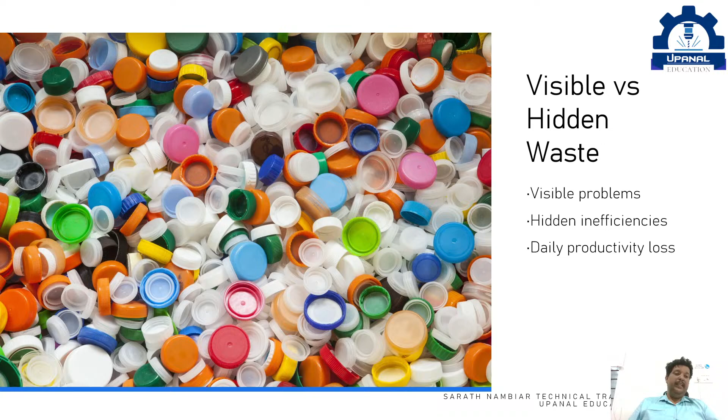These are activities that consume time and resources but do not add value to the product or service. Examples include unnecessary movement, waiting for materials, excessive inventory, repeated rework, poor workplace organization, etc. So, lean thinking focuses on identifying and eliminating these hidden wastes. Lean manufacturing. Lean, what do you mean by that? It's maximum value with minimum waste.

So lean manufacturing is a philosophy that focuses on maximizing value while minimizing waste. This value we mention here is not an amount or anything. It is the activities that directly contribute to producing a product or delivering a service that customers are willing to pay for. Anything that does not contribute to value is considered waste. The goal of lean thinking is not simply to work harder, but to work smarter by removing unnecessary steps and improving processes.

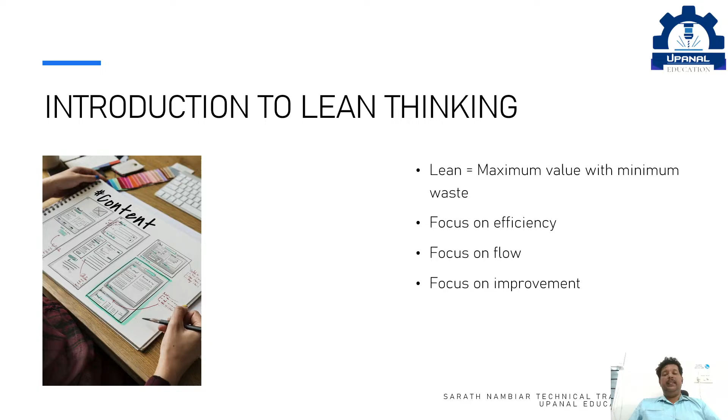Now, lean thinking identifies three major sources of inefficiencies in any process. It's known as Muda, Mura, and Muri. So, first one is Muda, which refers to wasteful activities that do not add any value. The second one is Mura, which refers to unevenness or inconsistency in production or the workflow. The third is Muri, which refers to overburdening people or machines beyond their capacity.

So, when you understand these three concepts, it will help organizations to design smoother and more efficient operations.

I hope you're understanding this. If you have any doubt, you can just message me in the message box and I'll be replying for that.

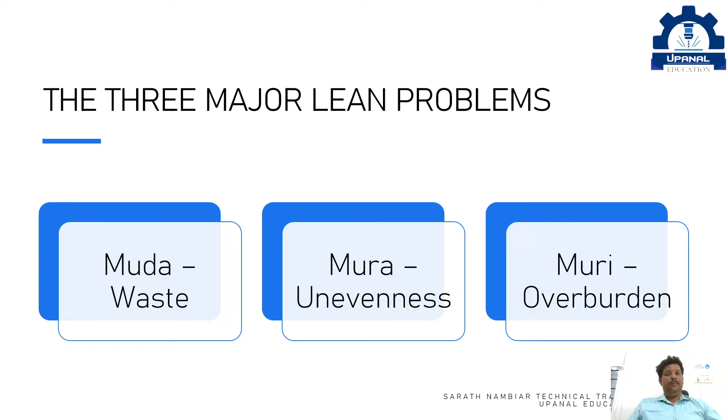Now, let's go individually through each of these. Muda. Muda represents the waste in the system, which includes any activity that consumes time, effort, or resources without adding value to a final product. For example, excessive transportation of materials, unnecessary motion by workers, waiting time between operations, and producing more items than required. Lean organizations constantly analyze processes to identify and eliminate these wastes.

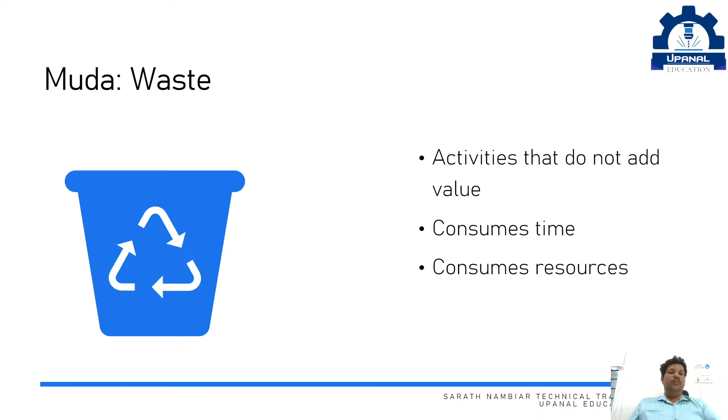This waste, actually, we can divide into different types. Lean manufacturing traditionally identifies seven major categories of waste. Transportation refers to unnecessary movement of materials. Inventory refers to excess stock that ties up capital. We need only five numbers, but we purchase and keep 100 numbers. What will happen? The items will simply stay there, but the money is going out from our hand.

Then motion refers to unnecessary movement of people. Waiting occurs when the workers or the machine remains idle. Overproduction occurs when more products are produced than needed: we need 1,000 pieces, but we make 2,000 pieces. Overprocessing refers to performing unnecessary operations. Those operations may not be required in that part, but people just do them. That is known as overprocessing.

Then defects refers to errors that require rework or scrap. These wastes collectively reduce productivity and increase costs.

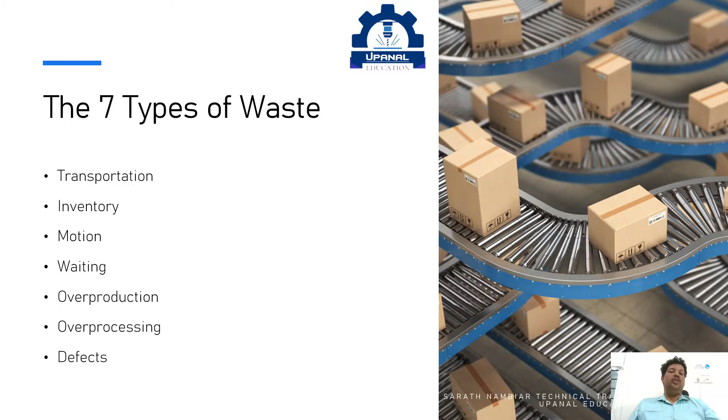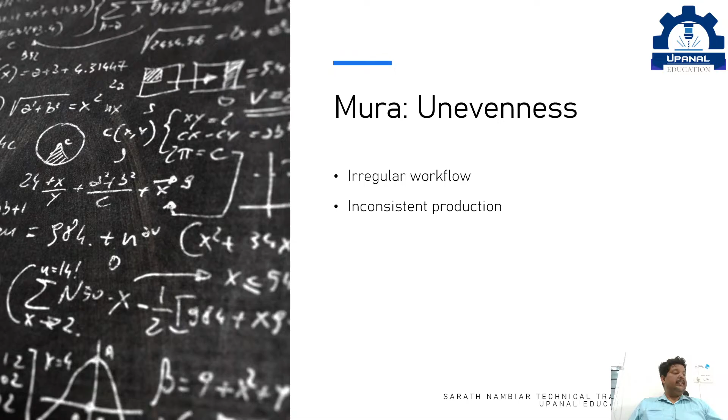Now we have finished Muda. Now we are going to Mura. What is Mura? Mura refers to unevenness in production or workflow. In many workplaces, tasks are not distributed evenly. Some workers may experience heavy workloads while others remain idle. Machines may alternate between periods of intense activity and long waiting times. This inconsistency creates inefficiencies and disrupts the smooth flow of the operations. So, Mura is just the irregular workflow and the inconsistent production.

Next, we are going to Muri. What is Muri? I told you Muri is nothing but overburden. It refers to the overburdening of people or equipment. When workers are forced to operate at unrealistic speeds or machines are pushed beyond their capacity, the result is fatigue, errors, and breakdowns. Lean systems aim to balance workloads so that operations remain sustainable and efficient.

So that was about lean management. Now we are going to the next topic, that is 5S. At this stage of the presentation, we move into one of the most powerful workplace improvement systems ever developed, the 5S methodology. The term 5S refers to five Japanese words that describe steps for creating and maintaining an organized workspace, namely Seiri, Seiton, Seiso, Seiketsu, and Shitsuke. Seiri means sort, Seiton set in order, Seiso shine, Seiketsu standardize, and Shitsuke sustain.

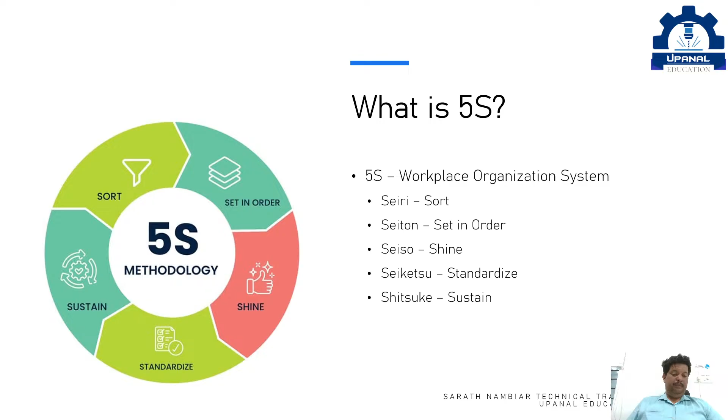Now, let's first understand why 5S is so important for organizations. In many workplaces, a large portion of time is not lost because workers lack skill, but because the environment around them is inefficient. Workers spend time searching for tools, walking unnecessary distances, or dealing with clutter. By implementing 5S, organizations reduce these inefficiencies. Tools are organized properly, materials are stored logically, and unnecessary items are removed. This significantly reduces the time required to perform daily tasks.

Safety is another major benefit here. A cluttered workplace often leads to accidents. Loose materials on the floor, obstructed pathways, and poor visibility can create dangerous situations. A well organized workplace reduces these risks. Quality also improves because problems become easier to detect. For example, when machines and work areas are clean, oil leaks or abnormal vibrations become visible much earlier.

So, 5S also creates discipline. It encourages employees to maintain order and take responsibility for their work environment. So, the first step of the 5S methodology is Seiri, which means sorting. Sorting involves identifying what items are truly necessary for the work process and removing everything that is unnecessary. Over time, workplaces accumulate items that are no longer useful: old tools, damaged equipment, excess materials, outdated documents. These often remain in the work area simply because no one has taken time to remove them.

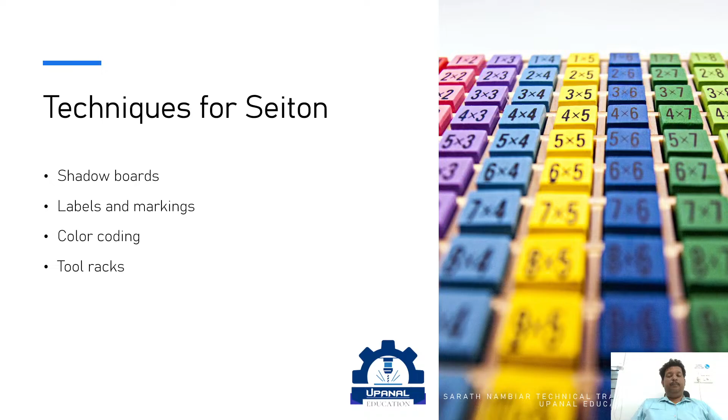The third step of 5S is Seiso, which means shining or cleaning the workplace. However, Seiso goes beyond simple cleaning. It's about maintaining a workplace where problems become visible. When machines and work areas are dirty, it becomes difficult to detect issues such as leaks, cracks, loose bolts, or abnormal wear. Cleaning provides an opportunity to inspect equipment and identify potential problems before they lead to failures. In many organizations, cleaning responsibilities are assigned to the machine operators. This ensures that machines are inspected regularly and that workers take ownership of their machines.

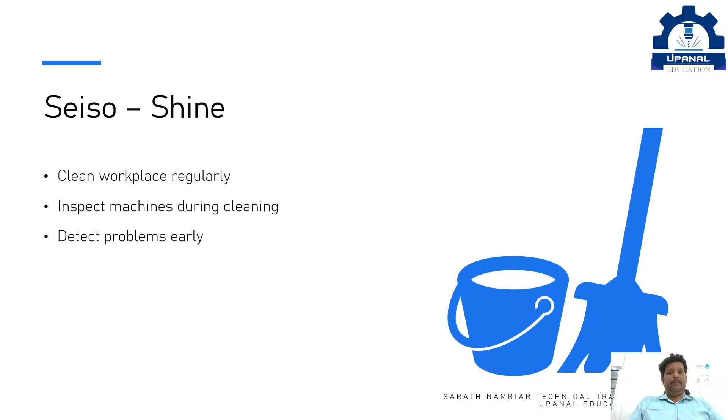After implementing the first three steps, the next challenge is maintaining those improvements. Without a structured system, workplaces gradually return to their previous states. Seiketsu addresses this challenge by establishing standards.

Standardization ensures that everyone follows the same procedure for sorting, organizing, and cleaning the workplace. Visual management tools such as floor markings, labels, checklists, and instruction boards are commonly used. These visual systems help workers understand what the workplace and what actions are required, what the workplace should look like, and what actions are required to maintain it. So basically, it creates the procedures and a system to give visual control.

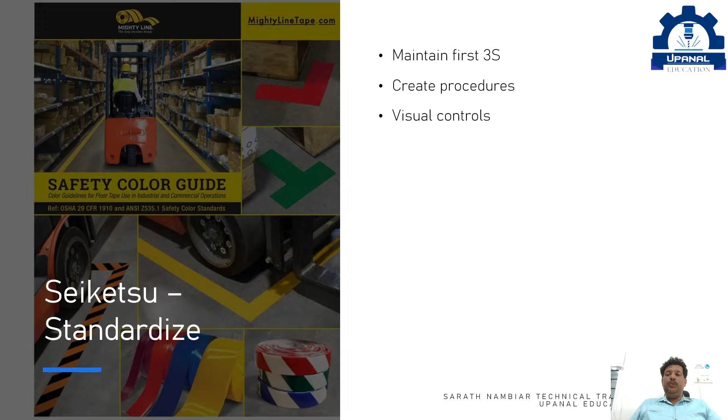The final step of the 5S methodology is Shitsuke, which focuses on sustaining the improvements achieved through the previous steps. Sustainment requires discipline and commitment from both workers and management. Organizations often conduct regular 5S audits to evaluate whether standards are being followed. Training programs are also conducted to ensure that new employees understand the importance of maintaining the workplace organization. Over time, 5S becomes a habit and part of organizational culture.

After establishing an organized workplace through 5S, the next step is continuous improvement. This is where the concept of Kaizen comes into play. The word Kaizen comes from two Japanese words: Kai means change and Zen means good - the change for the good. Together, they represent a philosophy of continuous improvement through small incremental changes. Instead of waiting for major innovations, Kaizen encourages workers to constantly look for ways to improve their work processes.

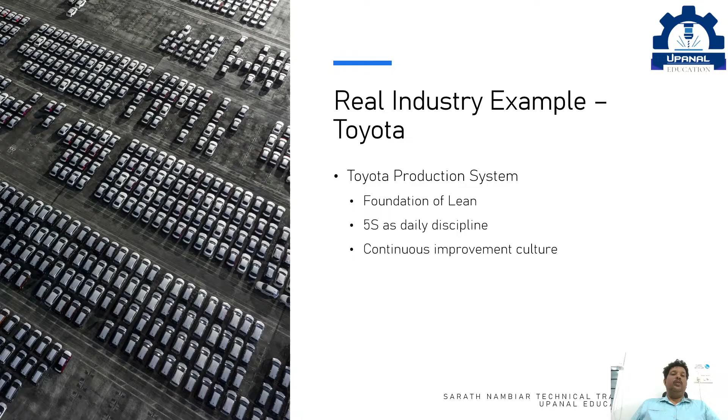Now let's consider a practical example from a CNC machining workshop. In many workshops, tools are stored randomly. Operators may spend time searching for tool holders, inserts, measuring instruments, or setup fixtures. By applying the 5S principle, the workshop layout can be dramatically improved.

Tool holders can be stored in labeled racks near the machines where they are used. Measuring instruments can be placed in a dedicated cabinet with clear markings. Raw materials and finished components can be stored in designated storage zones. Once these changes are implemented, operators spend less time searching for tools and more time performing productive work. The result is improved efficiency, reduced setup time, and a safer working environment.

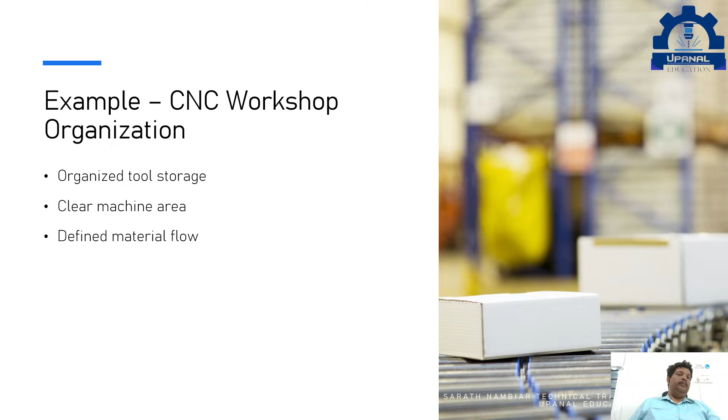Before implementing 5S, many workplaces appear cluttered and chaotic. Tools may be scattered across workbenches, materials may be stored randomly, and walkways may be obstructed by equipment or containers.

After implementing 5S, the transformation can be remarkable. Tools are arranged systematically, workplaces are clean, storage is clearly defined, and because of this, workers can perform tasks more efficiently because everything is easy to find.

This transformation not only improves productivity but also boosts morale. Employees feel more comfortable and confident working in a clean and organized environment.

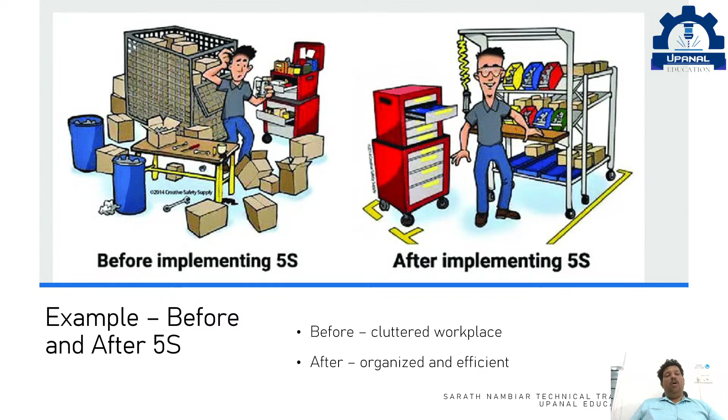Although 5S is a simple concept, many organizations fail to implement it successfully. One common mistake is treating 5S as a one-time cleaning activity. Teams clean the workplace once, take photographs, post them on social media or elsewhere, say that they have done it, and then gradually return to old habits.

Another mistake is a lack of management involvement. When leaders do not actively support 5S initiatives, employees may lose motivation to maintain the system.

Regular audits are also essential. Without periodic checks, the standards may slowly decline. The most important challenge is sustaining improvements. Building discipline and maintaining consistency requires long-term commitment.

Successful implementation of 5S requires commitment from the entire organization. Management must demonstrate support by allocating time and resources for improvement activities. Employees should be encouraged to participate actively in organizing their work areas.

Training programs help employees understand the purpose and benefits of 5S, and regular audits, continuous monitoring, and visual controls help maintain standards and ensure that improvements are carried out properly.

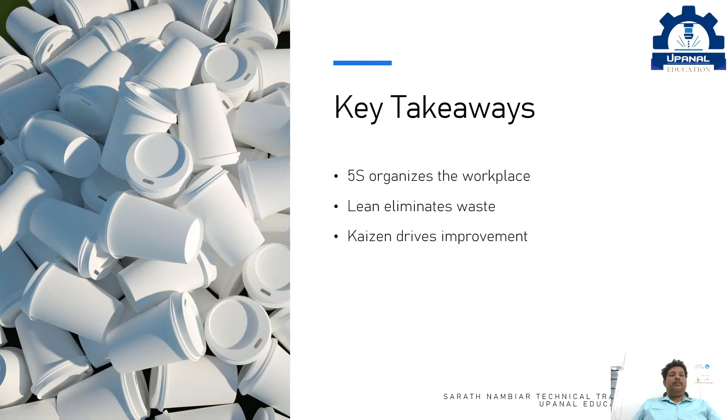Before we conclude today's session, I would like to leave you with a simple thought. Improvement does not begin with machines and it does not begin with technology. It begins with awareness. Tomorrow, when you enter your workplace, pause for a moment and observe your surroundings carefully.

Look at your workbench, your tools, your machines, the way work flows around you. Ask yourself one simple question: is this environment helping me work efficiently, or is it slowly letting me down?

Once you start noticing inefficiencies, you will begin to see opportunities for improvement everywhere. This is exactly how lean thinking begins.

5S teaches us to organize our environments. Lean thinking teaches us to eliminate waste. Kaizen teaches us to improve continuously. When these ideas come together, workplaces transform from chaotic systems into efficient and disciplined environments.

Always remember, great industries are not built by big changes alone. They are built by thousands of small improvements made every day.